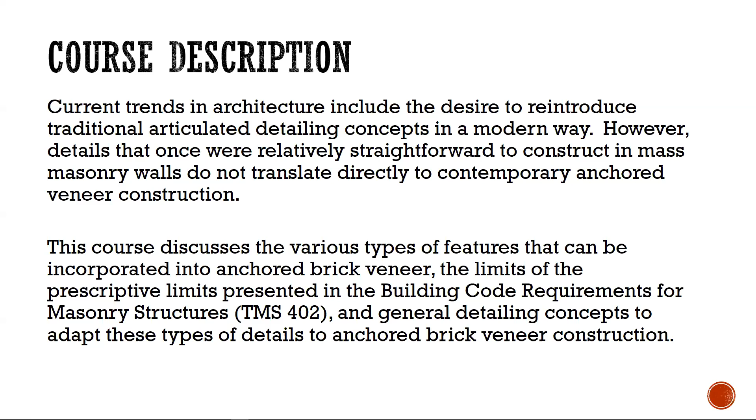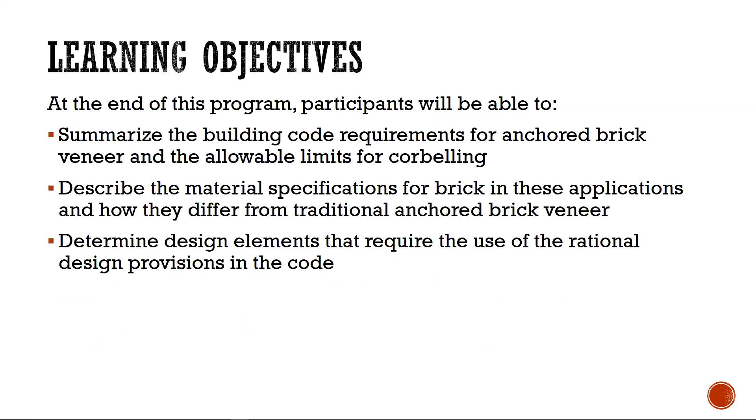Here's the description. Recently, there's been an interest in incorporating articulation into brickwork. Doing so in brick veneer is a bit different than incorporating it into a mass masonry wall. We'll discuss how to add articulation within the constraints of the code, the building code requirements and what they say about corbelling, the method used to incorporate texture or articulation. We'll talk about material specifications of brick, elements that need alternative design requirements or rational design to meet the code, and relevant weatherproofing and structural considerations for anchored brick veneer with textured articulation.

So here's a brief overview of the presentation. We'll start with the basics about brick units themselves and recap the types of architectural features that typically incorporate brick. Then we'll discuss the applicable code requirements and some general recommendations.

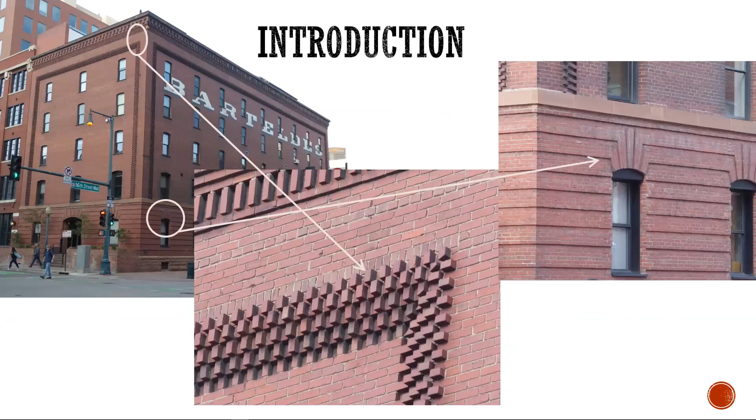However, in the modern period, flush, smooth surfaces became more prized, exemplified by the prominence of the glass curtain wall clad skyscraper. Recent trends suggest movement away from this minimalist style with increased interest in aged or rustic-looking materials, as well as surfaces with articulation, texture, and shadow.

Brick is well suited for the incorporation of texture and articulation. Despite technological advances, a brick is a handheld unit that's laid in the wall one at a time. Inherent in this process is the possibility that each brick could be laid differently than the one before it. So this statement might seem obvious, but it's also revolutionary.

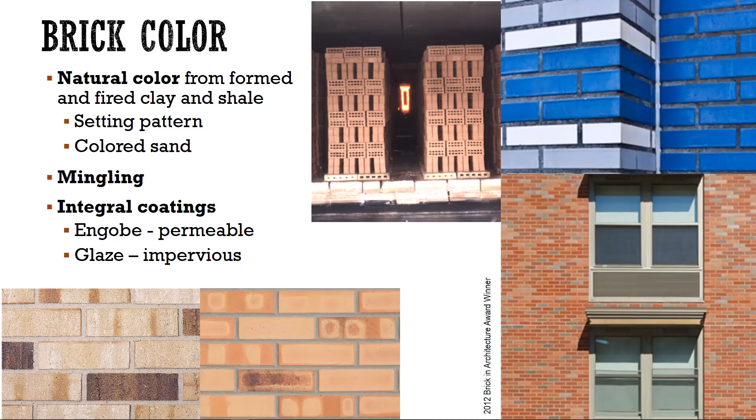We primarily use red shale, and most bricks are made from this. Some plants use buff burning clays. Some are fire clays that are typically found near coal seams, but others are kaolin clays, which are found closer to the coasts and other bodies of water.

Buff burning clays seem to bond with additives better than the red shales. So therefore, we use buff body clay for glazed and engobe work.

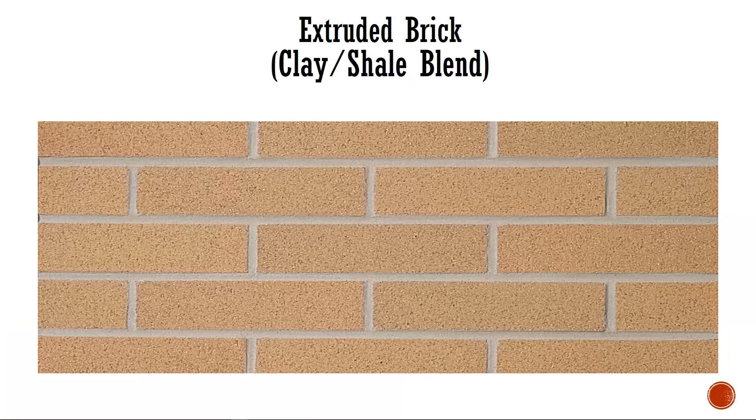Unlimited, eye-catching, vibrant colors are available with traditional glazed brick. And subtle shades of gray created with engobe coatings, which are part glaze and part clay, can give us as many colors as you'd ever want.

The texture of the brick units and the profile of the mortar joints can be varied to create subtle shadows that will work well to create interest at the human scale compared to the overall building.

The left image depicts a combination of smooth-faced brick with a V-shaped joint profile that accentuates the outline of the brick unit. A similar effect is achieved in the center with a rough textured brick with rake joints. And at the right, mortar in a similar color as the brick is used in combination with a concave joint profile to allow the back-rolled texture of the brick to be the prominent feature.

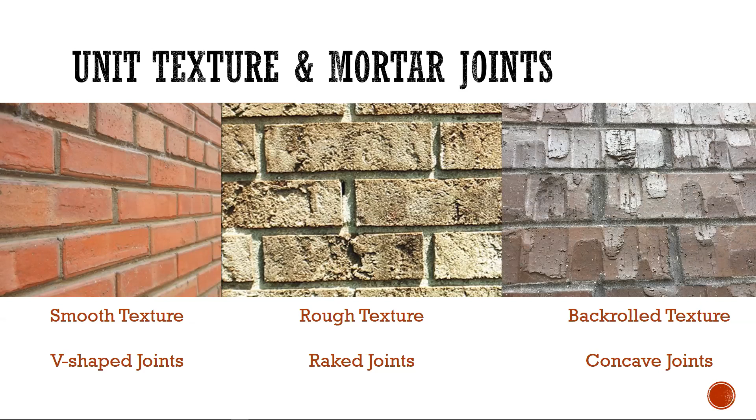When highly textured brick units' surfaces are viewed at a distance, the distinct texture may no longer be visible, but the subtle shadows are still detectable, creating a mottled or variegated appearance to the suggested finish.

Mortar joints are typically 3/8 of an inch or 1/2 an inch wide. About 20 years ago in Kansas City, an old brick salesman was training me, and he taught me that when matching an existing brick wall, the first thing I need to do is look at the mortar. We don't think about it, but mortar is really about 20% of the wall, and mortar joints can have a significant visual impact on the wall.

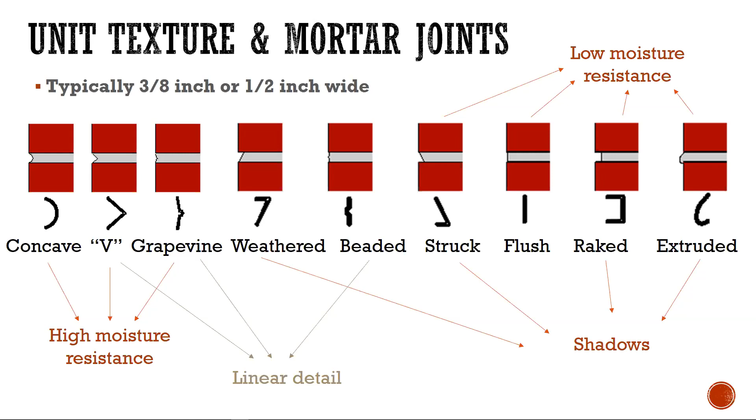You're not limited to one joint profile in a given wall. Different mortar joint profiles can be combined in a given wall section for an increased visual effect. Frank Lloyd Wright was famous for his combination of raked bed joints with flush head joints to accentuate the horizontal elements of his designs. A similar effect is used in modern applications.

Here's another trivia question. I'd like you to raise your hand if you can remember the song There Must Be 50 Ways to Leave Your Lover.

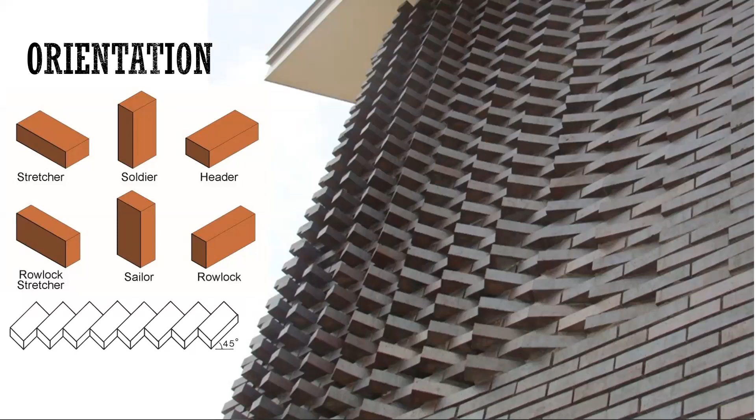The most common type of bond pattern is called the running bond, which consists of all stretcher brick with offsetting head joints between the courses. Most familiar is half running bond, which is 1 brick over 2. Also, we can do a third running bond, which is a king size brick or a utility brick, and a quarter running bond with a 16-inch long brick.

Flemish bond alternates headers and stretcher units all in the same course, on all courses. An English bond includes alternating courses of all stretchers and then all headers. Stack bond aligns the head joints of each course in the brick. Due to the required tight alignment, brick with closer dimensional tolerances are necessary, and we'll talk about FBX brick in just a minute. Other variations of these types combine 2 or 3 stretchers with a single header. So brick is flexible and can go in the wall however you want it to go in.

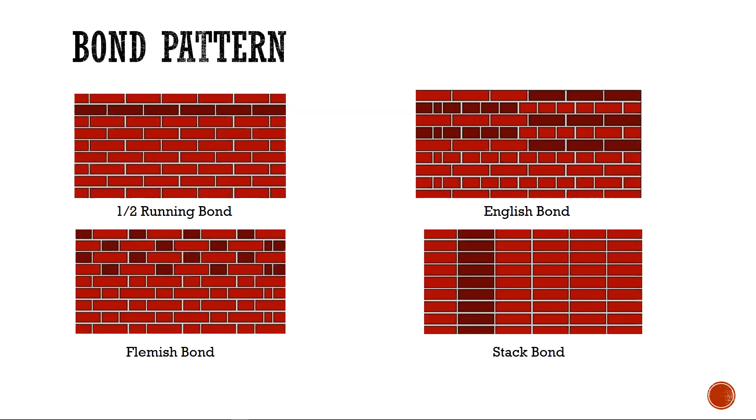Banding, also called belt courses and string courses, is often used to create horizontal emphasis. They need not project from the main plane of the wall, consisting of bands of different bond patterns and different material. Stone, cast stone, terracotta, or architectural precast concrete can be used in lieu of brick. Differential movement joints between the bands of brick and other material must be considered and might require accommodation in the details.

Banding need not be limited to continuous courses. The building at the right shows the combination of short bands that were offset to create a wavy aesthetic on the wall.

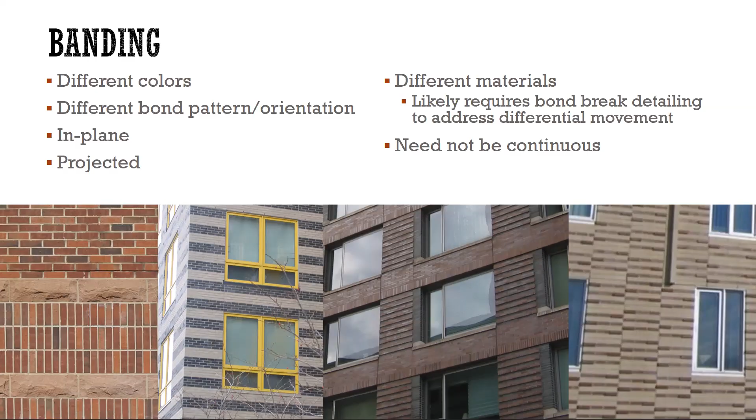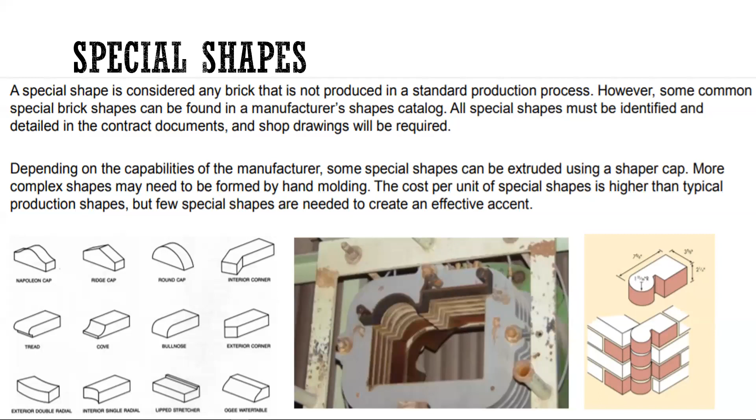One of my favorite special shapes is called a hinge brick, as you can see in the die and on the lower right-hand corner. Hinge brick were used at every window of this private residence on the Missouri River. Here's a close-up of it, how they used it on the edges, and a little bullnose brick off to the right side of that angle that's closest to us.

But hinge brick are really neat because the walls don't have to be 90 degrees. They could be any shape at all, and the hinge would accommodate that.

Quoins are an ornamental accent used to accentuate the corners of a building. They can be formed from a variety of materials, similar to banding, but most often consist of brick, stone, cast stone, terracotta, or architectural precast concrete. When other materials are used with brick, the quoin is often flush with the brickwork, as the difference in material or color provides the intended emphasis. They should also be flush with the interior side of the brick, if possible.

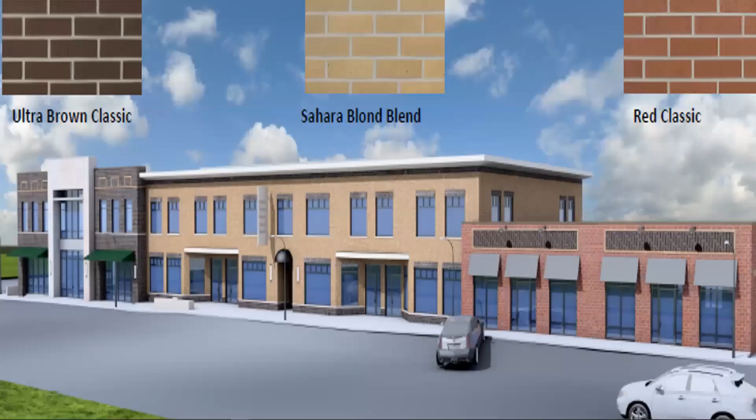Banding, accents, and soldier courses can certainly add a lot of visual appeal to your projects. If you've ever laid a brick, you know how hard it can be to lay one brick in a soldier course—they're slippery, they're muddy, they don't stay where they need to stay. So masons really struggle with soldier courses.

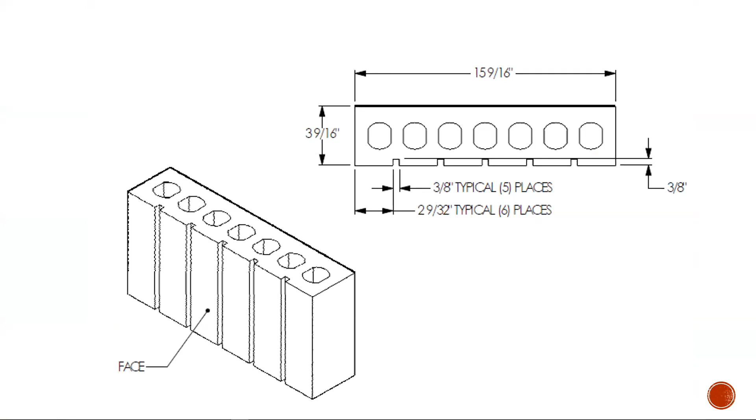But if a mason could lay a 4-inch by 16-inch unit that's full of false joints to look like a soldier course, just imagine how much easier the mason's job just became. Or instead of a header course, what about if the mason laid one 16-inch long unit that looks like a header course?

How much easier would it be to lay one brick that's 16 inches long rather than 1, 2, 3, 4, 5, maybe 6 different headers, all slipping and sliding around in the mud while we're trying to keep them straight as that mortar cures? How much straighter will this header course look as a finished product—faster, straighter, better, simpler? It's a real win-win for all involved.

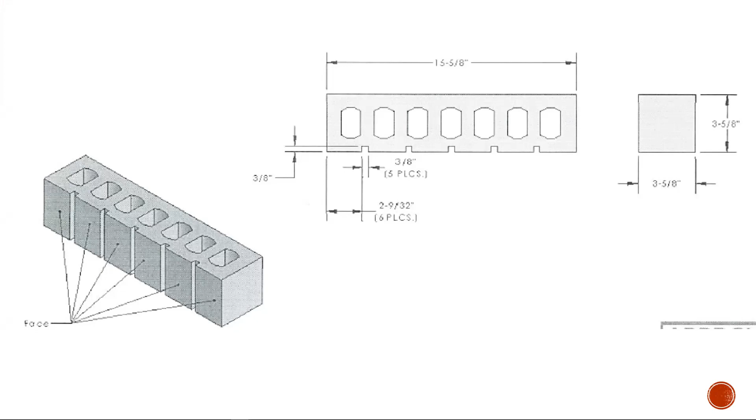The masonry arch is one of the oldest structural elements and the consummate example of form following function. Its structural advantage results from the fact that under a uniform load, the internal stresses are principally compressive. Because brick masonry has greater resistance to compression than tension, the masonry arch is frequently the most efficient structural element to span openings.

I apologize, but we're going to get into some heavy lifting here. Material requirements are provided by ASTM C216, which is the standard specification for facing brick. Solid masonry units are made from clay or shale. They're categorized as solid, but they don't always have to be solid—they can be up to 25% void, as you see in these images.

The type of brick—type FBS, type FBA, type FBX—relates to dimensional tolerances. Type FBS is the default type intended for general use, and type FBX has stricter tolerances, which makes it ideal for stack bond applications. Type FBA is the least stringent. You'll need to be aware of these loose dimensional tolerances of type FBA for certain patterns or elements, because a stack bond wall wouldn't look all that good with different sized brick if an FBA brick were used.

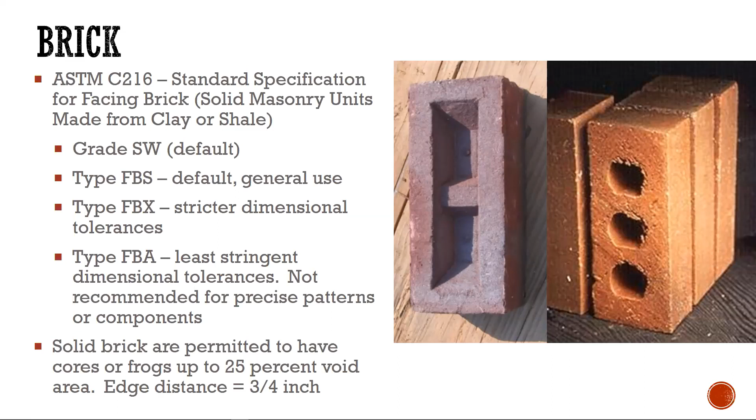So FBA brick, maybe handmade brick, maybe tumbled brick, maybe distressed brick. If you're going to build your castle, why not use handmade brick? And of course, your castle needs to be right by a large body of water.

Looking at FBS brick, it's the default or general use brick. They can be slightly irregular. It can be made with character, as we can see with these soft paper cut brick, designed with soft surfaces and rough cut edges, newly extruded brick made to look like they're 100 years old.

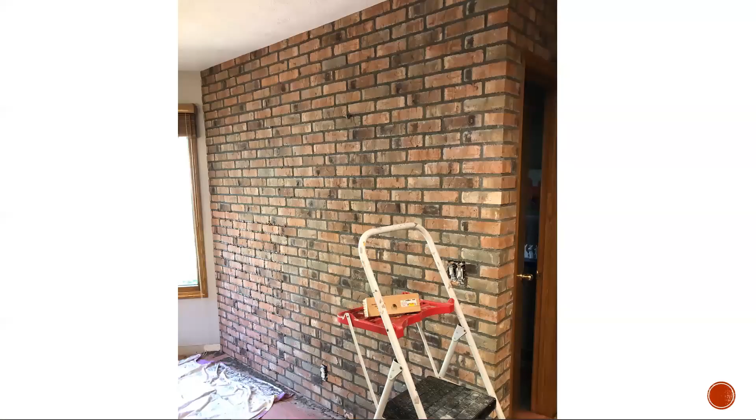What would these be perfect for? They'd be perfect for a beautiful little coffee shop where you're trying to create that relaxed, comfortable ambiance. Or for a young, aspiring brick salesman from Omaha, the interior of your dining room wall would be a great place for FBS brick. Well done, Mike Lund.

So FBX brick are stricter. They've got beautiful, tighter dimensional tolerances. We lose some strength in stack bonded brick, and the code calls for horizontal reinforcing wire in stack bonded applications to help give us some of that strength back.

The Masonry Society Code 402/602 is building code requirements and specifications. With respect to anchored masonry veneers, there are two sets of provisions: the more commonly used prescriptive requirements that most of us are familiar with, and the alternative design requirements that permit rational design.

Let's talk more about prescriptive code requirements. These are what designers are most familiar with. Brick used for anchored veneer typically have a 4-inch nominal width and actual measurements of 3.5 inches to 3 5/8 inches. The minimum veneer thickness is 2 5/8 inches.

Because of this requirement, all brick orientations might not be feasible for anchored veneer. If the brick height is less than 2 5/8 inches, bond patterns using sailor and rowlock stretcher configurations won't work. While the Masonry Code doesn't indicate a maximum thickness for anchored veneer, the upper bound is generally accepted to be about 5 inches deep, based on limits from our legacy building codes.

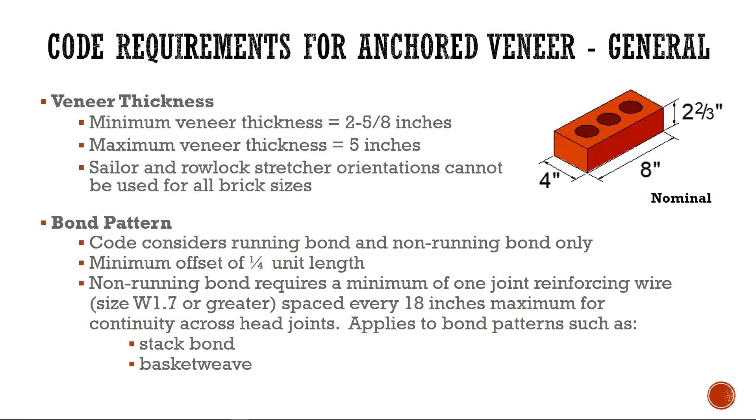Because of the alignment of the head joints, maybe wire reinforcing is a good idea to ensure that wall stays together. The type of veneer tie used will vary based on the backing material and the dimension of the airspace in the drainage cavity, with a minimum airspace of 1 inch, with 2 inches being preferred. The maximum airspace permitted is 6 5/8 inches. In the case of stud walls, the cavity is measured from the face of the stud, not the sheathing.

Adjustable ties are most commonly used as a veneer tie. Veneer ties generally consist of sheet metal parts, wire parts, or a combination of both. Sheet metal parts must be a minimum of 0.06 inches thick. When the airspace is between 4 5/8 and 6 5/8 inches, higher strength or heavier grade ties are needed. TMS 402 talks about the requirements for these heavier gauge ties in more detail.

One veneer tie must be installed for each 2 2/3 square feet of wall area, with a maximum spacing of 32 inches horizontally and 25 inches vertically. If you do the math, you'll notice the ties are spaced at 32 by 25, and the area per tie will exceed 2.67 square feet. These dimensions give placement options on stud walls, since you shouldn't be fastening ties to anything other than stud walls.

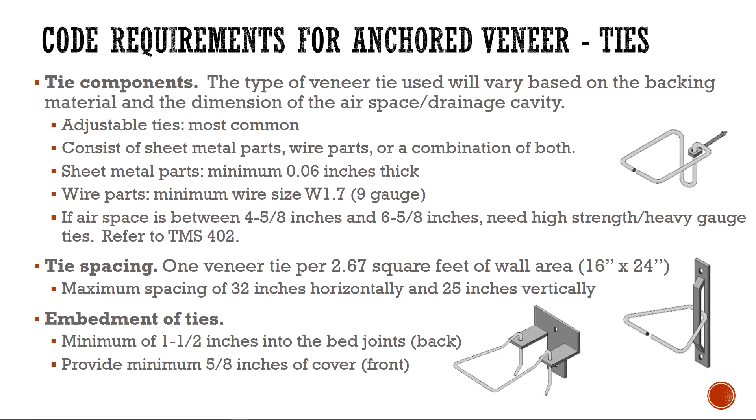Cases with high wind, for example above 40 pounds per square foot of design pressure, the TMS 402 describes additional requirements needed to be met.

As we discussed at the beginning of the section, the code includes both prescriptive and alternative design requirements. The prescriptive code doesn't apply in all cases, and that's the nature of prescriptive requirements. They cover the simplest and most common cases and are based on certain assumptions for their use. Cases that do not meet these assumptions must be designed per the alternative design requirements. These include cases with high wind, where the average roof height is over 60 feet, and the cavity exceeds 6 5/8 inches.

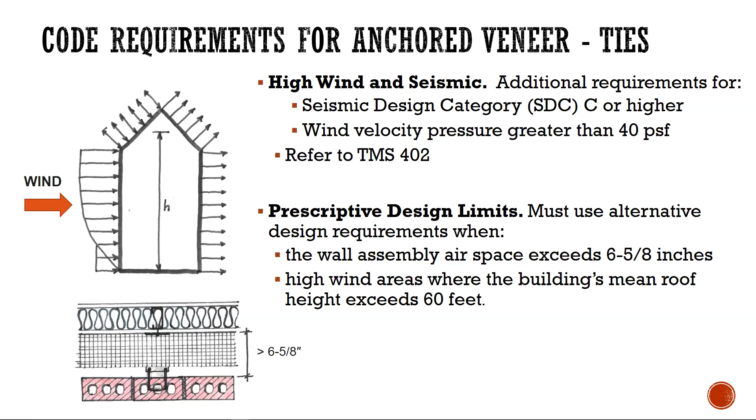Now we get into the specific code provisions that we'll use to incorporate texture into brickwork.

The process of corbelling is used to construct projections and recesses in brickwork. It involves shifting successive courses of brickwork outward or inward from the main plane of the wall. For the purpose of today's discussion, only non-load-bearing corbels or corbelled elements are going to be discussed, due to the focus on anchored masonry veneer.

As you can see by the formula, really 1/3 of the width of the brick is allowed to corbel over. If you're using brick with core holes, keep in mind that the brick core hole might be as close as 3/4 of an inch. Therefore, the best rule of thumb is to corbel 1/2 inch or less. However, while these corbelling limits exist, with solid units it's not a problem.

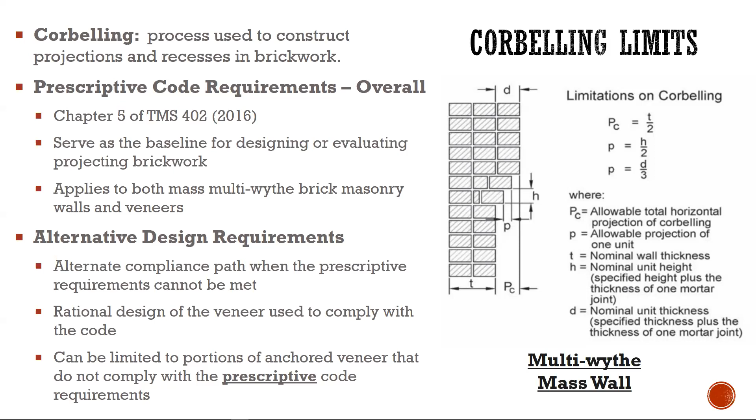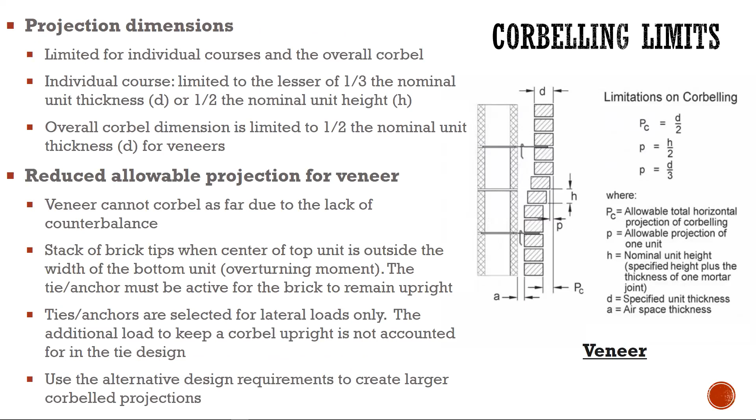So this is a multi-wythe mass wall, and these are the limits on corbelling mass walls.

General recommendations: these are the things you want to consider to incorporate into the contract documents. Most important is to provide extra direction in the design intent. Don't expect the mason just to figure it out. Involve other design and construction team members early in the process as appropriate, and account for it in your budgets and scheduling. There's no reason not to get a structural engineer involved, because likely corbelled elements will not conform to the prescriptive code requirements.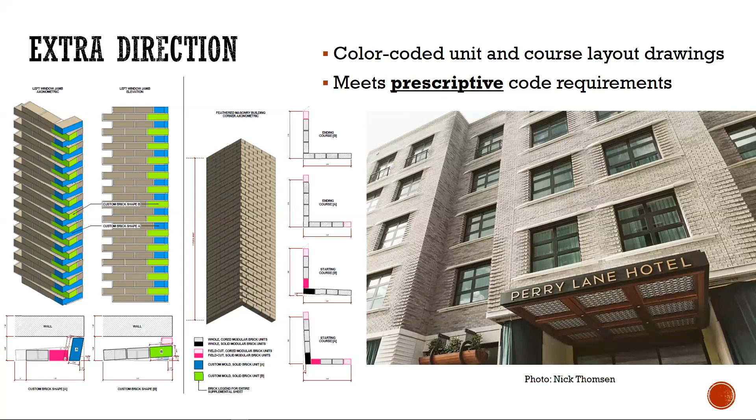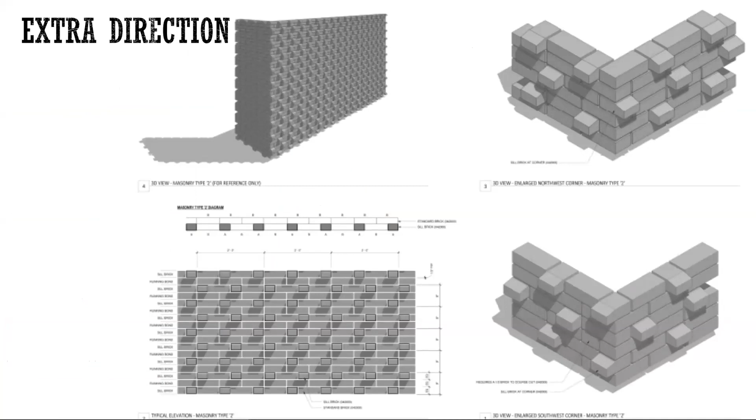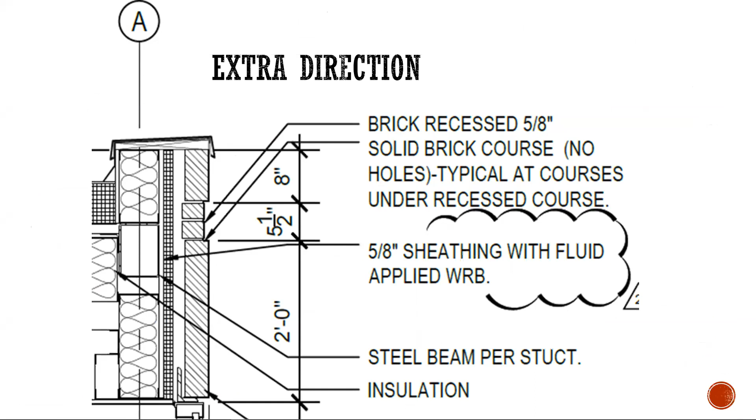So here's some extra direction information that an architect added on a couple different projects. What I like about this is it calls out that we need a solid brick, no holes. It makes it clear for everyone. A mason is sometimes tempted to just try to use a brick with core holes, but nope, it's called out on the drawings, and everybody is certain we need solid brick there.

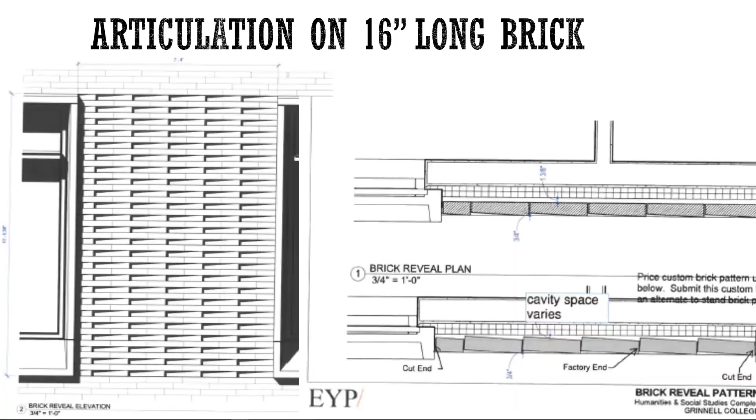So articulating a 16-inch long brick was a real fun exercise on a big project that won a Brick in Architecture Award recently from the Brick Industry Association. It turned out to be gorgeous, and the shadow lines are just beautiful. It was a fun project to be involved in. It was a big project, so they wanted to do something to break up the size of the building, and that articulation is just breathtaking in real life.

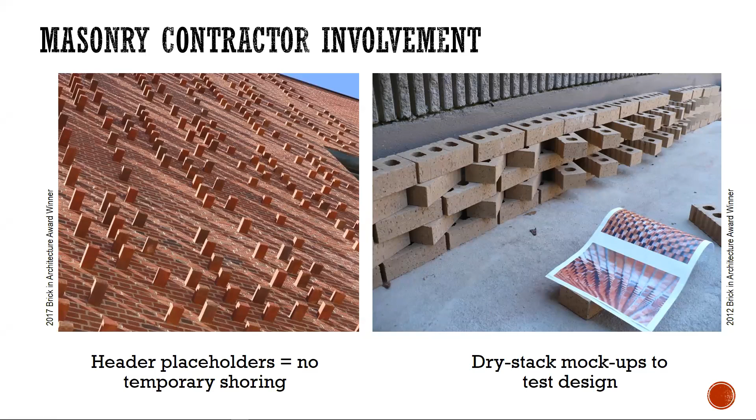In the case of the project shown on the left, the mason's suggestion was to use temporary placeholders for the projecting units, allowing the wall construction to proceed efficiently without extensive temporary shoring. The projecting units were added after the brick portion of the facade was complete. On the project on the right, a dry fit mock-up was used to determine how the wall would be built. In the final product, brick without core holes were used.

As discussed previously, solid brick are permitted to contain cores or frogs. However, for textured brickwork, it's recommended to use brick without any cores or frogs, which needs to be explicitly specified. The reason we want no cores or frogs is because a third of the unit thickness for a 4-inch nominal brick is about 1.33 inches, and as mentioned earlier, cored brick can be 3/4 of an inch from the edge distance of the core. So we'd hate to see those core holes, and they might fill up with water in cold climates.

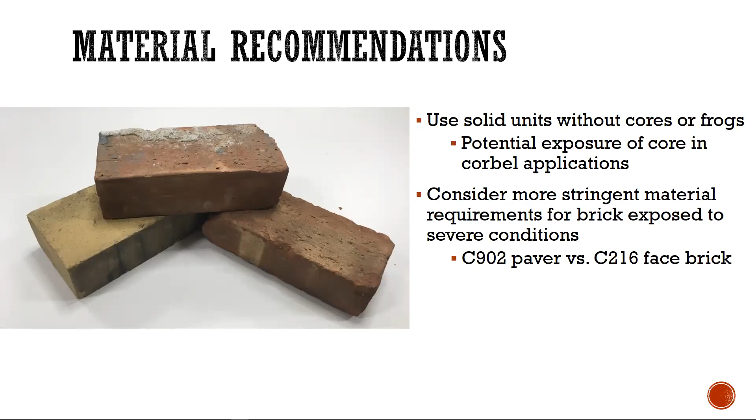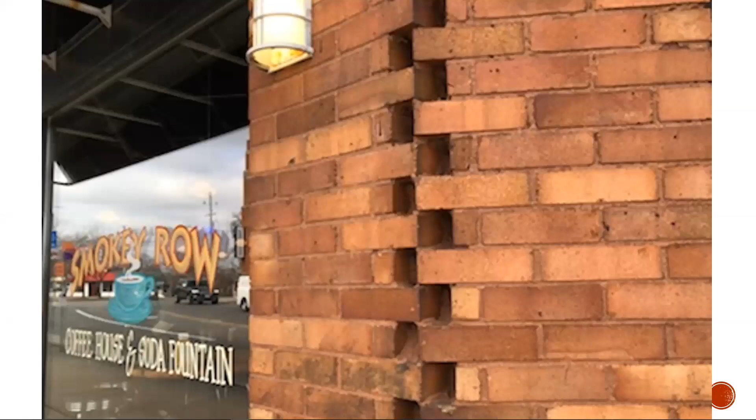One of my favorite examples of this is Smokey Row Coffee House. As you can see on the top, there is nothing overhanging, nothing protecting this brick. Yeah, there is a little awning, but it misses. We're going to look primarily at this left corner, left of the entrance. It's solid brick, and it's been there for over 100 years, as this building's been repurposed now into a coffee shop. The solid brick have stood the test of time and not needed any replacement. Maybe they've needed a little mortar over 100 years, but they've really held up well.

So the brick veneer assembly that provides the maximum water resistance is flush brickwork. Only one face is exposed to the water, and it sheds on a vertical surface. Any projecting unit or element where we have multiple brick faces exposed to the temperature extremes of moisture and the environment certainly sees increased environmental exposure.

It causes water to get in there if that snow is sitting there and then it melts. So horizontal projections can collect standing water and snow, subjecting the units below, the mortar joints, and the surrounding area to prolonged contact with moisture.

So the increased exposure and increased risk of water ingress is inherent in constructing brickwork with projecting and recessed features. Maybe this is an option where we want to see a breathable sealer applied, or maybe this building will just have to be maintained and tuck pointed a little bit more often. But whatever the case, it's definitely a stunning building.

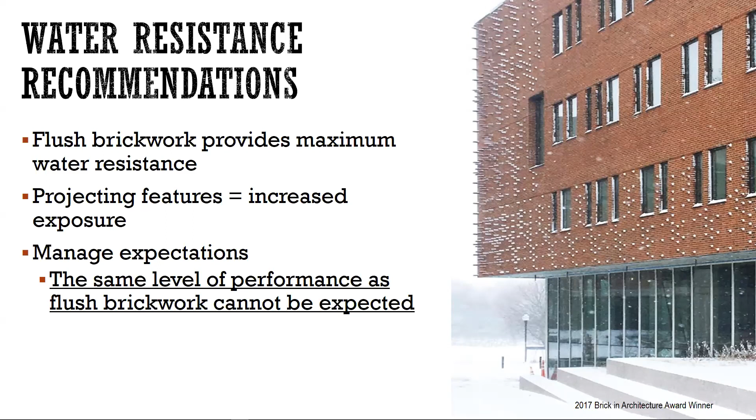When we create articulation on the exterior, what really happens to the interior plane? It's recommended to trim back the units where possible, keeping in mind that the minimum thickness of a brick needs to be 2 5/8 inches.

As an alternative to trimming, we might be tempted to install a mortar wash, but that's not recommended because that mortar might just hold more moisture in it on the inside of the wall.

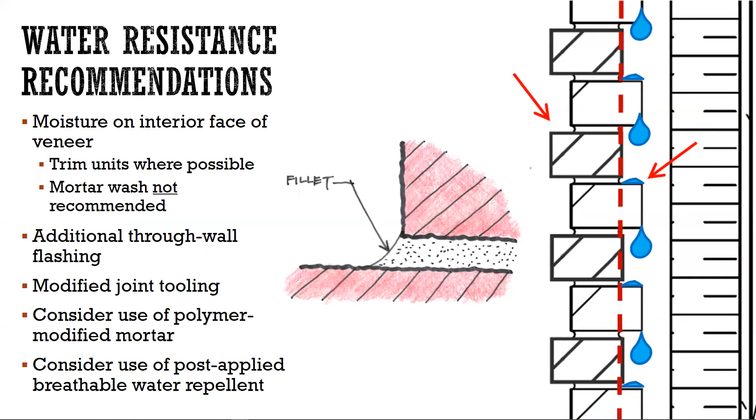So the next thing that we're going to look at are some examples. The first set of examples will be projects that were created within the PCR.

So the variations in color, unit texture, and bond pattern can easily be integrated into the traditional anchored brick veneer while staying within the prescriptive code requirements. In the photo on the left, the diagonal or diamond-shaped formation is called a diaper pattern.

In the photo on the right, brick of different colors were combined on a larger scale to create a color block effect. Designs need not be limited to traditional patterns—modern modeling software can treat each brick unit as a pixel for limitless options.

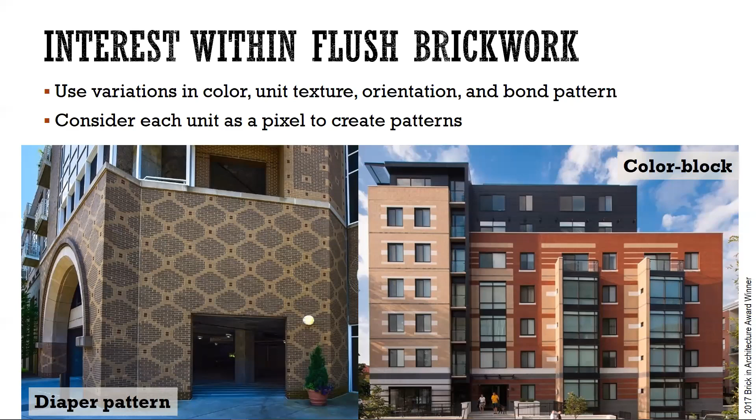This nondescript garage is in St. Louis Park, Minnesota, just right along a nice interstate. What I love about it is that it's a nondescript garage, but with a little design, a beautiful blue glazed brick was inserted in the middle of this diaper pattern, making the wall interesting. The brick out here at this rain gutter were corbelled out from the surface.

So I love just seeing that wall, and I think all the commuters that move from downtown Minneapolis to the suburbs also enjoy looking at it. It's a local landmark for me.

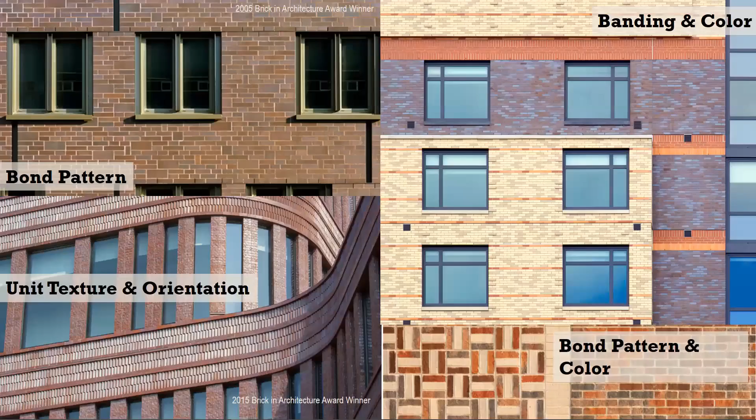In the top right, we're using banding with a focus on color. In the bottom right, a combination of bond pattern and color is used. The example is a school where the same field brick was used throughout, but each wing had a different color used in the basket weave pattern.

Projections up to a certain dimension are permitted within the prescriptive code requirements. A good way to start incorporating projections is to start with bond patterns that include brick in header orientation.

In the tan brick in the middle on the lower area, for this design, the main portion of the wall is laid in a running bond. The area with the projections is laid with running bond and Flemish bond. One course of Flemish bond alternates with a course of running bond, with each header unit in the Flemish bond courses projecting the same dimension from the main plane of the wall.

In the red brick image on the top, the entire wall was laid with Flemish bond. However, the amount of header unit projections is varied from flush to several inches to create this pattern we can see. And the tall wall on the far right, the entire wall is laid in a running bond pattern—instead of projecting a brick in a header configuration, a stretcher unit is projected.

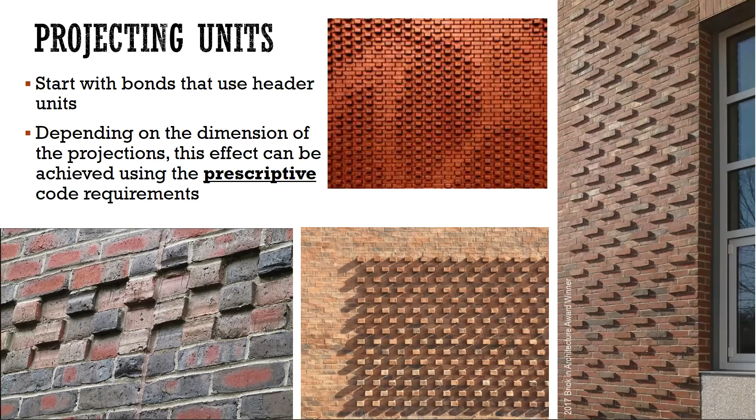Long projections trigger the use of the ADR. This example incorporates a combination of different units, textures, and projecting units to create this effect, which can be achieved using the prescriptive code requirements.

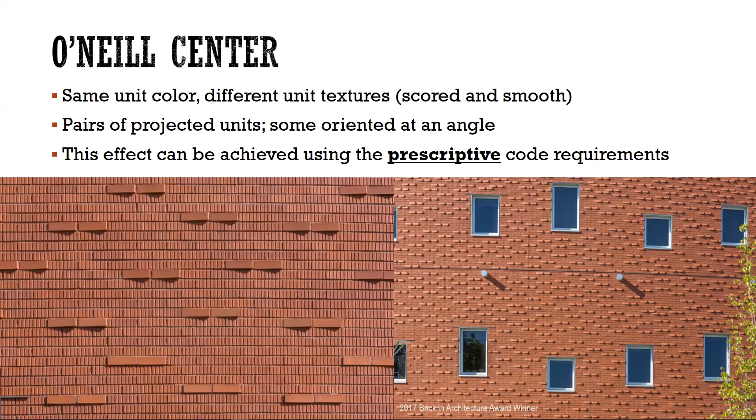The corbelling rules can also be used to create recess detailing. A combination of running bond and Flemish bond is used on the facade, with the overall inset area in a Flemish bond incorporating recessed headers for additional relief. This effect can be achieved using the prescriptive code requirements. As discussed with projecting units, deep recesses will trigger the alternative design requirements.

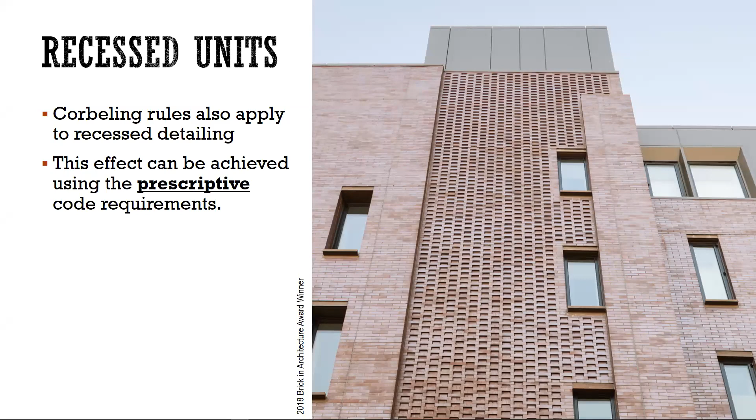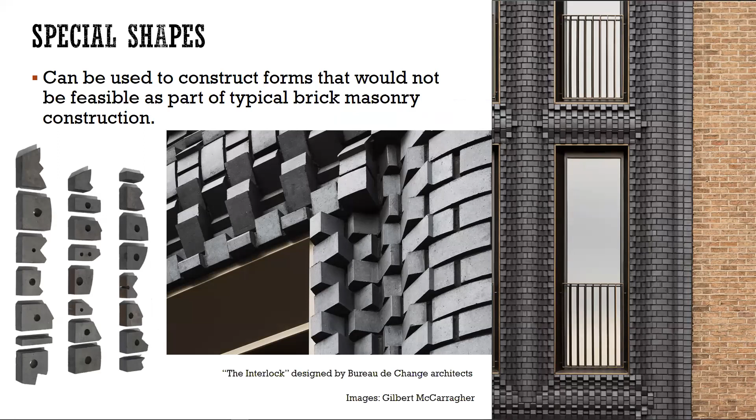Here, the verticals are simply curved piers and are not subjected to the corbelling requirements. Depending on the bearing of the units and the dimensional projections, if needed, the alternative design requirements would only apply at the spandrels. In this case, the special shape units were used to increase constructability.

Here, a Norman-sized brick with a false joint was used with two different color finishes on the same unit.

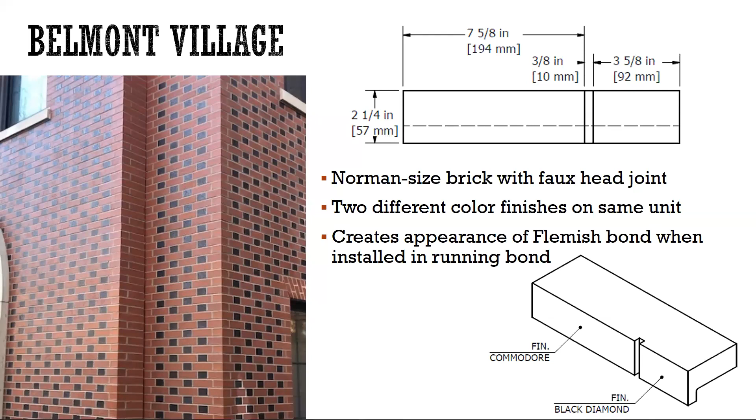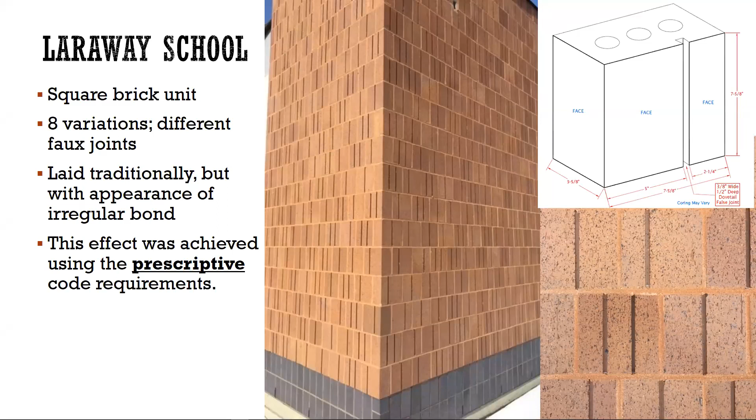Here's another example that incorporates a special shape to great effect. For this project, a square 8x8 brick was used. Eight variations of the brick were created, each with a different false joint pattern. It was laid in a typical running bond conforming to the PCR, but results in a beautiful appearance of an irregularly bonded pattern.

Now we'll move on to some examples that use the alternative design to comply with TMS 402. The primary aspect that distinguishes the ADR from the PCR is that engineering analysis is required. The most straightforward use of this alternative design requirement is a case in which projections of individual units exceed the limits in the prescriptive corbelling requirements.

In this type of situation, you may only need extra ties or stronger ties, but the engineering evaluation needs to be performed. Heavier gauge ties and strap anchors and stone anchors can be used in this application.

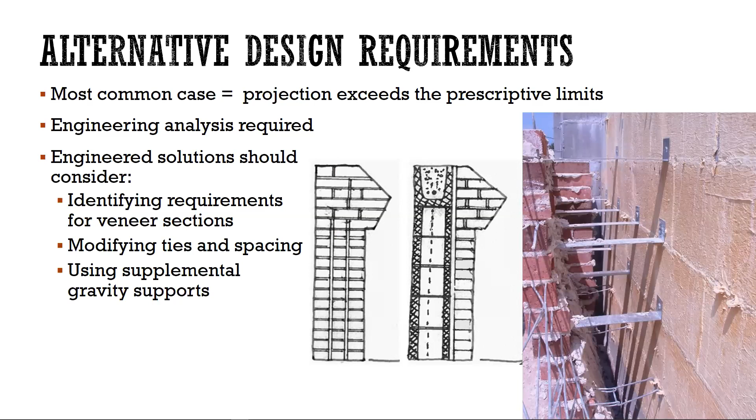Designed by Kennedy and Violich, this project is a reclad of an existing building on the Harvard University campus. A multi-directional sloped and corbelled feature wall was designed for the location above the entrance.

Cold-formed steel framing was used as the backing, and an engineered tie system was developed to anchor the corbelled brick to the backing. The anchors, rather than relying on the bond within the mortar joint, engaged the brick through dowels inserted in custom drilled holes to ensure that none of these bricks are going to fall on any of the students. A brick-faced precast concrete panel was used on the soffit above the entrance.

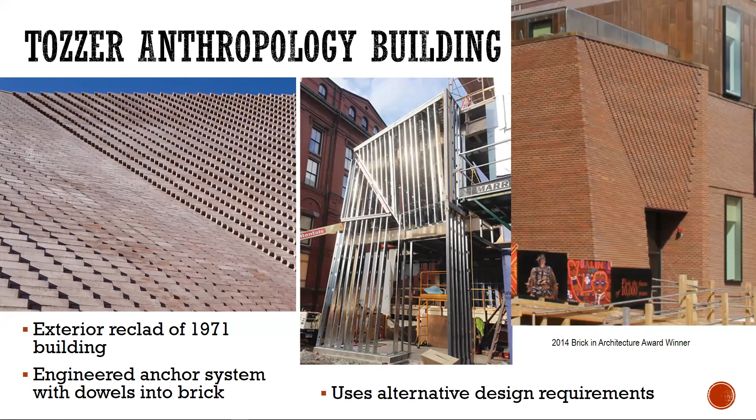Designed by PLY Plus, this chapel is an addition to an existing hospital in Michigan. For the project, a mix of bond patterns was used, from typical stretcher running bond to an intricate detail that included a feature in which the square corner at the base of the wall was transitioned to a curved corner at the top of the wall.

Brick units were rotated in opposite directions in alternating courses within the curved areas. No brick cuts were used to create the effects in these areas. All the bricks installed were solid units without cores or frogs.

Each fold created a pocket to receive reinforcing steel and grout, and mathematical formulas were used to generate the optimal coursing patterns.

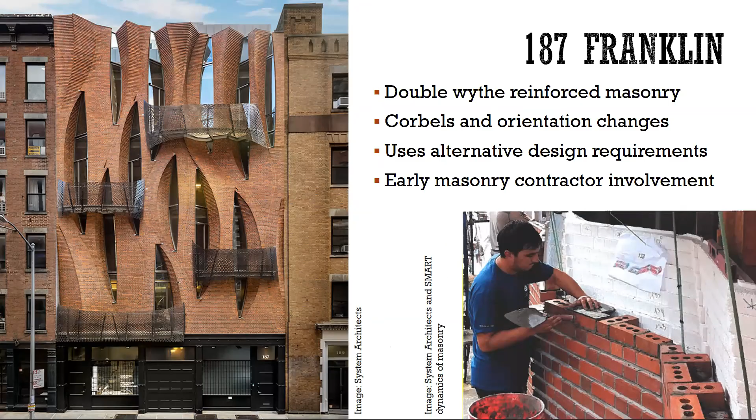So far, we've talked about hand-laid and anchored brick veneer. Brick-faced architectural precast concrete is an alternative option to achieving interesting effects, particularly deep corbelling effects that would be difficult or time-consuming to achieve.

Each architectural precast concrete panel and its connectors are designed by a subcontractor, so it's delegated design. Shop drawing development and review are required, but a lot of possibilities are out there in the precast world.

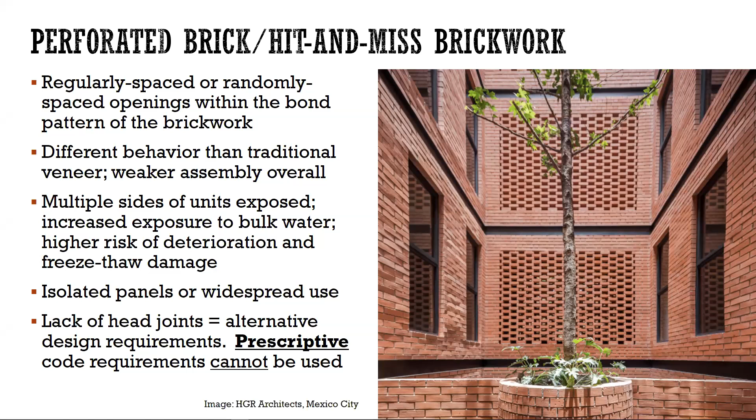Perforated brickwork is also known as a screen wall, pierced brickwork, or hit and miss brickwork. It's characterized by regularly spaced or randomly spaced openings within the bond pattern of the brickwork. The popularity of this brickwork style has increased in recent years, expanding far beyond its previous role in garden walls and utility areas.

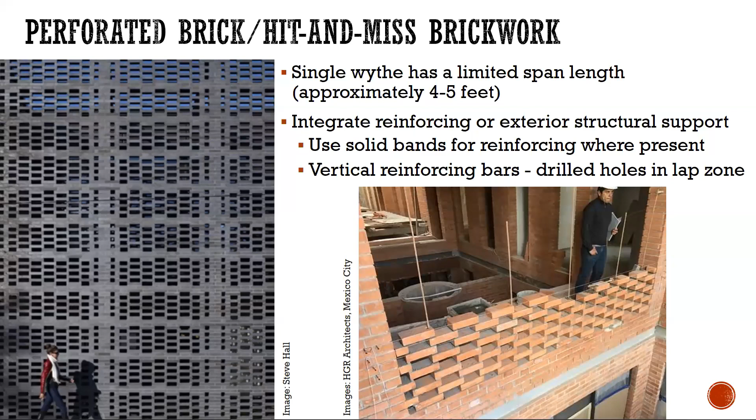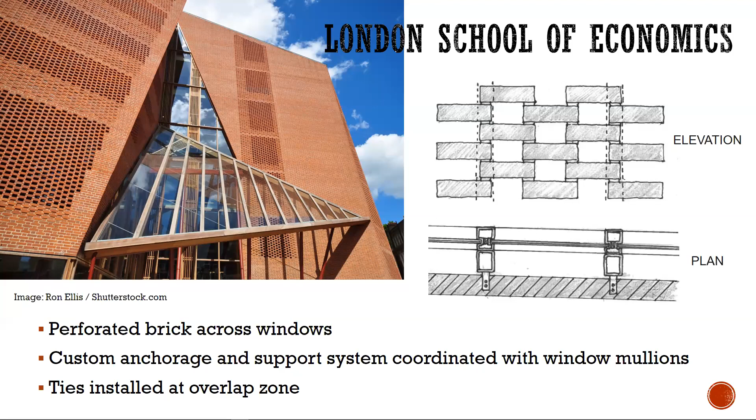The Student Center at the LSE is often used as an inspirational example. It's got wide swaths of perforated brick spanning across windows. The perf brick appears unsupported, but anchorage is present. It's concealed behind the overlap zone of the brick. Structural steel tubes called windposts were fabricated to match the width of the brick and align with the window mullions. The windposts attach to the structure and provide a substrate for the brick tie attachments.

So we'll talk about the building code requirements and what they say about corbelling.

Just as a review, TMS 402: typically we've got a 4-inch nominal width with brick, and we need a minimum of 1-inch cavity, with 2 inches being recommended. The maximum airspace is 6 5/8 from the face of the stud, and additional engineering and additional anchors need to be used when we're from 4 5/8 to 6 5/8. We talked about two-part wall ties being used every 2.67 square feet, and we talked about the alternative design requirements.

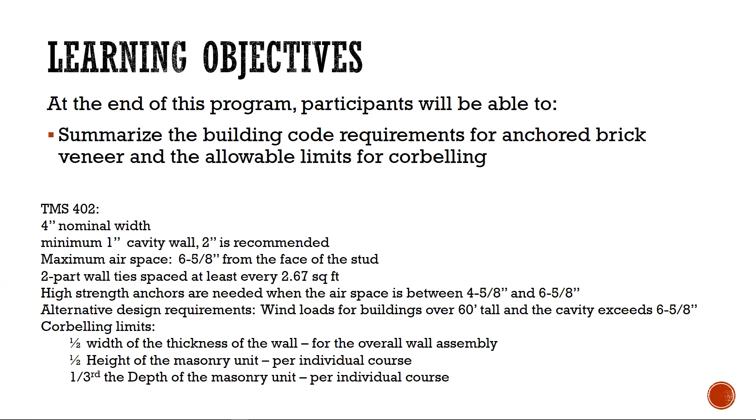We also want to be talking about the material specifications of the brick. We reviewed type FBA, type FBS, and type FBX, which is the most strict, tightest guideline. Grade severe SW, severe weather brick, is generally what all North American producers are making these days. And also, maybe we want to use solid brick or brick pavers in a wall.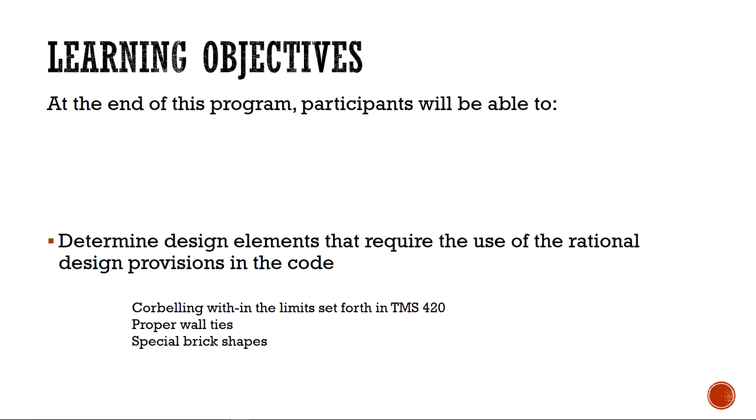We also wanted to determine design elements that require the use of rational design codes. So we talked about corbelling in line with the limits set forth in TMS 402. We talked about proper wall ties and special brick shapes as well. Again, we talked about all the resources available at our BIA website, gobrick.com. And here's a look at the code requirement publication, TMS 402.

In summary, the Masonry Code provides two sets of requirements for anchored brick veneer: prescriptive code requirements and alternative design requirements for cases where the prescriptive requirements can't be used or they just don't apply. Brick design used in the PCR can incorporate variations in color, texture, orientation, bond pattern, as well as features including some projections. The ADR allows for the design of larger projections and creative features to comply with the code.

Notice that the examples shown all took advantage of technology such as digital modeling, as well as heavy collaboration between the architect, the engineer, and the contractor to achieve the final result. On that note, I encourage you to befriend a structural engineer and a mason and see what types of unique brickwork you can achieve.

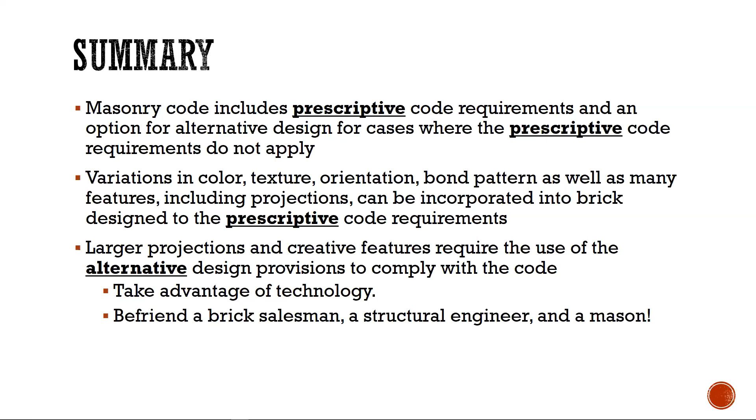Megan writes: for the brick screens, is it recommended to have the brick shape made with the hole included for vertical reinforcement, or to drill the brick on site? That's a great question. There are probably 50 different brick manufacturers in North America. That number is getting smaller all the time, but really it's a function of the clay and the capabilities of each brick plant, and that's where this heavy collaboration is going to come into play and really be the right answer. I don't have the right answer—it just depends. Clays are different, brick plants' capabilities are different. Start asking questions. Thank you. Great question.

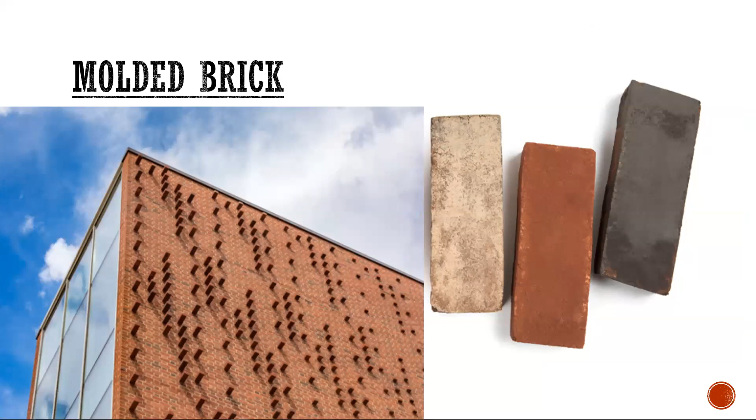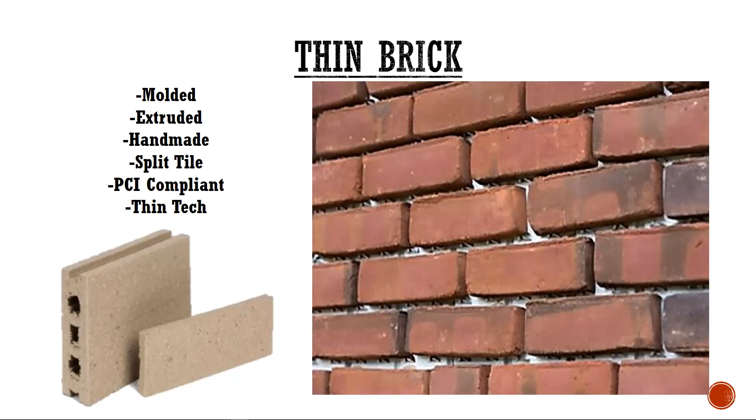That wall featured is a brick project with our molded brick. We have a lot of thin brick capabilities - we cut molded brick, as you can see on the right, and we extrude split tile as thin brick as well in some of our plants. Any brick you want, we can make it as a thin brick as well as a full bed brick, so you can match - maybe an interior project can be thin brick.

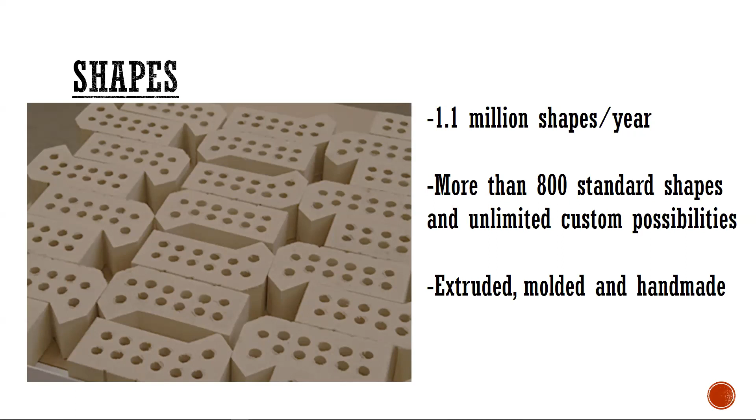But our primary business is extruded brick. As you can see, we've got all kinds of textures, shapes, and colors. We do a number of pavers as well, and we make more than 1 million special shapes a year. We've got a beautiful catalog on our website, and the offer is out there - if any of our 24 seminars that you can read about on our website are available to you, Kevin Lindstrom would be glad to deliver a special shapes seminar to your firm at any time.

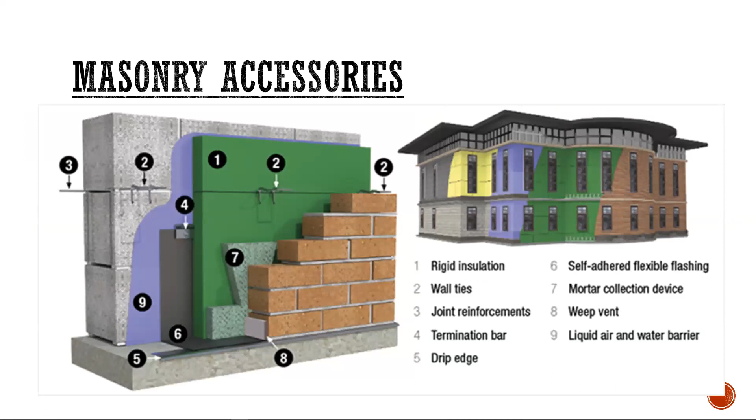We also have a division that specializes in what's behind the wall, and we want to review your Division 4. We want to be a resource for you, because getting it right and making sure that all the wall products behind the brick wall are compatible - that they won't melt when they come in contact with each other, that they'll perform - we want to help you make sure they perform.

We've got one more question, a random question, okay?

Are there new products available that replicate the size and vitrification of old street pavers? Old street pavers are sometimes formed, and they're beautiful. Yes, we have a number of products that can be tumbled to look like used, beat up street pavers, and yes, we make modern pavers fired at required temperatures to achieve vitrification. It's kind of difficult for me to answer that random question immediately, so let's contact our favorite Glen-Gery representatives and ask that question. We're here to help, that's my best answer.